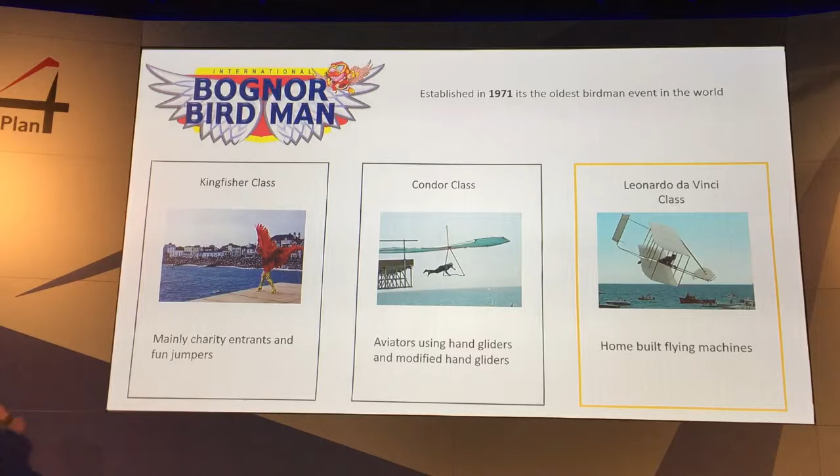So early 2016, I made the plunge and decided to give it a crack - build my own Leonardo da Vinci class aircraft and fly it in the competition. I had to really think about it, and I looked back at what past entrants did, saw what worked, what really didn't. There were a lot of failures, don't get me wrong.

But the considerations I had to make were mainly space - I've only got a single carport garage in which to build it, so I had to really be creative with how I use the space. Money - I'm funding it myself, I had no outside sponsorship, so that was a real restriction, because you couldn't go straight in with carbon spars, bit of an issue. So I had to be quite creative with the materials I used to produce it. And obviously the time factor - I work a full shift, I've got family responsibilities, so I was limited in that respect.

But the first year I entered was the first year they removed the wingspan limit for the Leonardo da Vinci class aircraft. That really opened the door to the possibility of sustained human-powered flight, which, my mind exploded when I heard that. I was all geared up for a limited wingspan, limited potential, but as soon as I heard that, my ears pricked up and I was good to go.

During my initial investigation into the world of human-powered flight, I came across this fantastic website - Chris Roper's website - which basically gives you a blueprint of how to build the perfect human-powered aircraft. It wouldn't have happened without that website. I'll rave about that all the way through the presentation, because it is really fantastic.

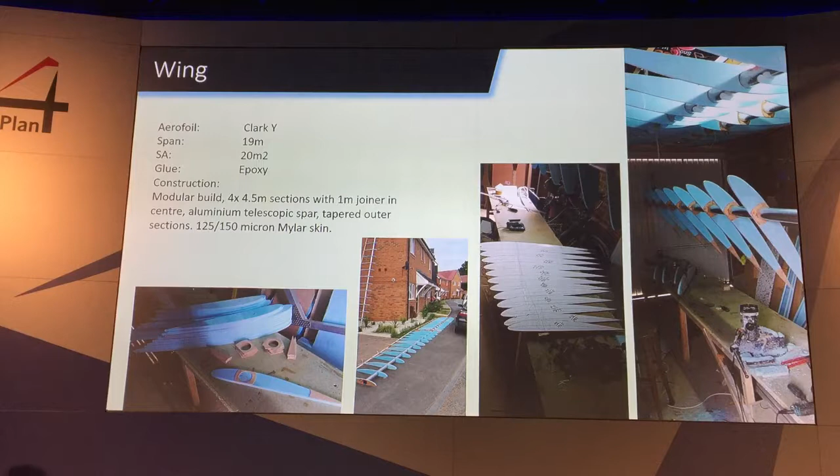And here's just the outer ribs preparing to be cut with the rib strengtheners there. The rib strengtheners and the outer two ribs were made of plywood I bought from Wickes. So 3.5mm plywood, just standard, just cut it on my router. I mean, it wasn't ideal material, but it was cheap, accessible, and it worked absolutely brilliantly.

So moving on to the fuselage. To keep it as simple as possible, as I said, I never built one of these before. I never built anything this large before. So I decided to keep it very, very simple. And the simplest way I could think of doing that is to keep everything box section, because it's easily attached to itself, easily cut, easily machined. So I went with box section, and it turned out pretty well.

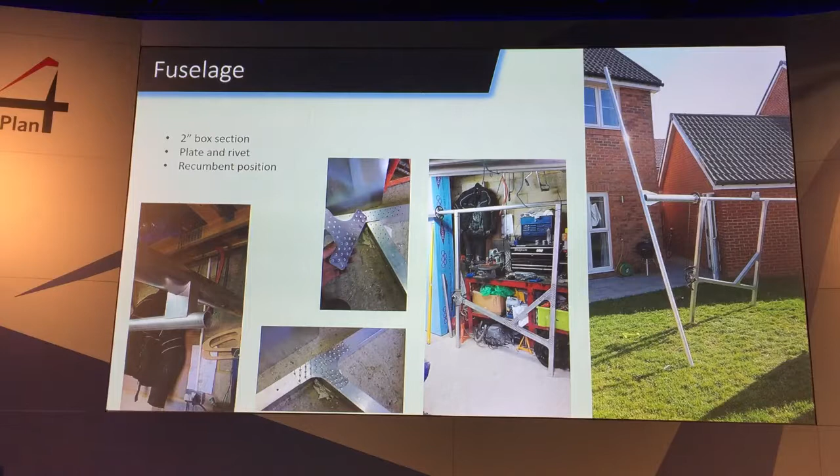Okay, so my control surfaces on Mark I Zephyrus. Probably the weakest section of the whole machine, if I'm totally honest. I used control cables as a method of controlling them. The surface area in relation to the rest of the fuselage, the wing, the centre of gravity, was all a total guess. I had no idea what I was doing. It was more how it looked. So I think in that respect, it was a fairly good guess.

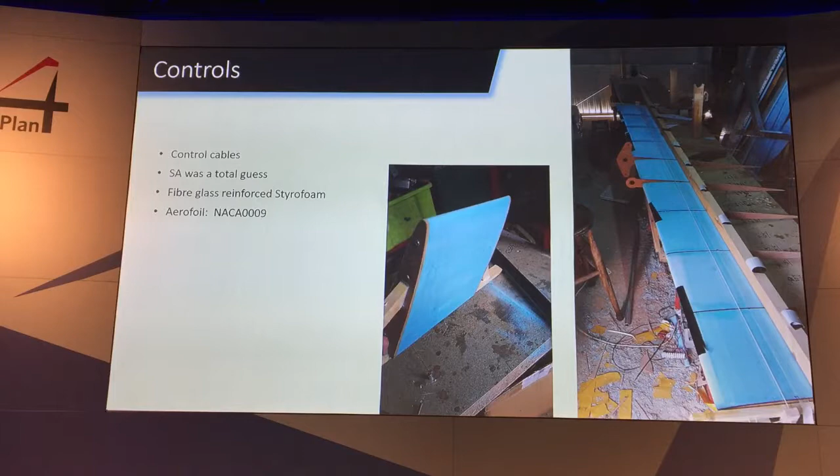And the actual strength of it was made up of the styrofoam, and I had fiberglass tape resin on there. And that was actually fairly secure, so I'm quite happy with how that turned out.

the chord, the size of the prop, the airspeed, the RPM, and it fires out the perfect design for a propeller, and it's ideal. It gives you all the efficiencies lined out, so I could really accurately predict my cadence that I'd have to cycle at, the airspeed that I'd have to achieve. With the other calculators online, the power calculator, I knew the required airspeed, so I could pretty accurately guesstimate that prop was efficient.

And although this aircraft was totally inefficient, given the weight, the materials, my first attempt, I did overestimate the amount of power required. So I put it at about 700 watts to maintain steady flight. To put that into perspective, to cycle at 20 miles an hour on a standard road bike is about 200 watts. So whether I'm even able to hit the 700 watt mark, I'm not sure. So it was a bit of a shot in the dark. Again, it's just for Birdman, I gave it a crack. And it turned out very well.

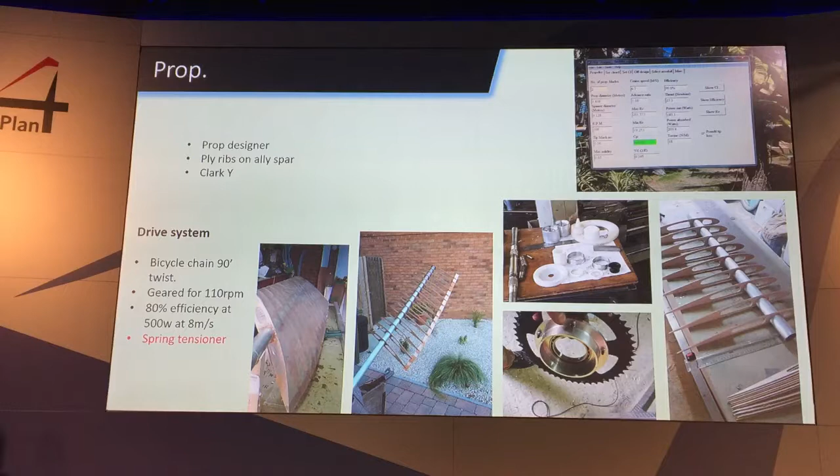So the chain drive system, I had a standard bicycle chain that came up from the main centre drive. It twisted through 90 degrees, and I was really concerned that was going to come off immediately. But it was very secure and held on very well. Geared for 110 RPM. It worked out about 80% efficient at 500 watts. So the 500 watts mark was about my average power output, I guess. And I had a spring tensioner device, so it kept the slack side nice and secure.

So I've got a little video now, just to demonstrate. This is my friend Ed. He helped me out in the last few weeks. So here we go.

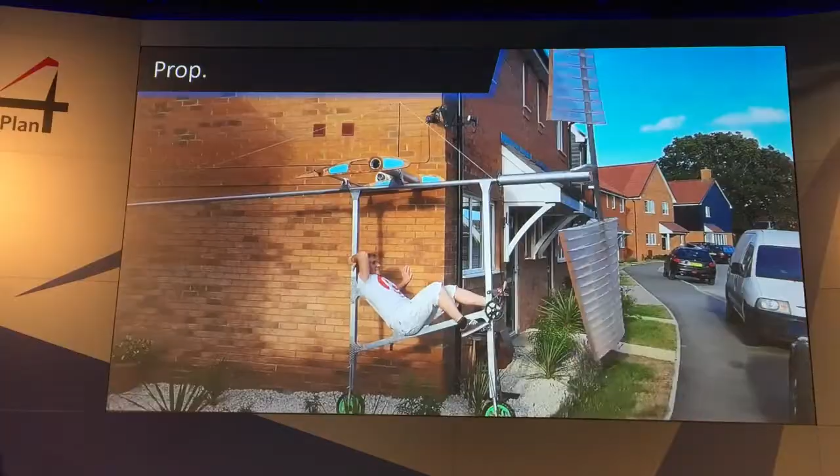You can see we were tight on space, so I had to do it in my front garden. It's very stable there, Ed. You can see the spring tensioner there as well, and we'll come back to that. So there we are. Thank you, Ed.

Had big issues. And a friend of mine, Scott Wallace, and I'll touch on him a bit later on, really helped me out. He cut the top of the rudder off and put it as a tab on the front. That really helped things out. Aerodynamically balanced, it was much better. So again, that was a big error I made. But on the day, it was ready and we were good to go.

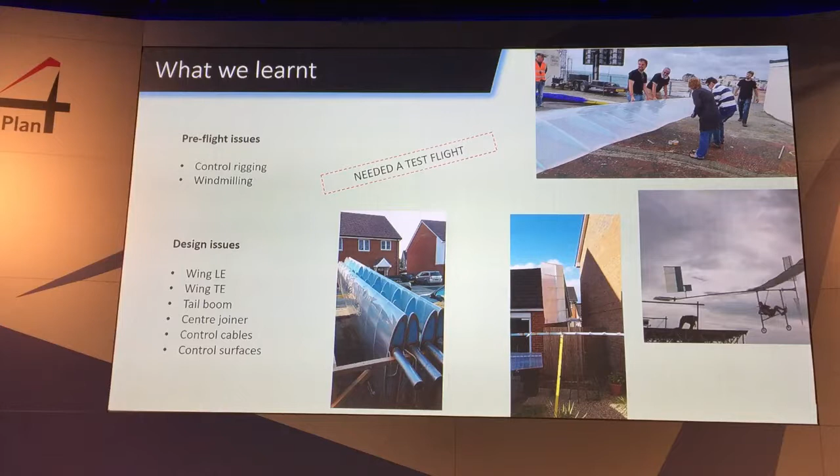So, big one, we needed to have a test flight. That's the main thing that we needed to have. Just to get everything set up, see the weak points, understand what could have gone wrong on the day. I think we could have gone 4 times the distance we did. We achieved 25.2 metres, I think. Sorry, 35 metres. But to be honest with you, I was over the moon that it flew, but I was a bit disappointed that we didn't get a little bit further.

So test flight was the biggest point there. The pre-flight issues we had: if you look at the end picture there, to the right, can you see my control stick hanging down from the centre of the fuselage there? See how far back that is, set to nose up? And it's a nearly neutral control position. So on the day, obviously it was all rigged up last minute.

So had that been rigged up so that control stick was 20 centimetres further forward, I might have had a bit more range to be able to pull out of that dive. But there we go, you live and learn. Also, we had a lot of boom flex, which again doesn't help the control surface and feel. So a lot of that was lost in the boom flex, and also I had the fishing wire as control cable, so there would have been a massive delay on the actual input.

In terms of the design issues, so the built-in problems, we'll cross out the tail boom, I just mentioned that. The wing leading edge, you can see in this image here, this is after it's been shrunk.

We've got terrible creasing, which again wasn't too much of an issue on the day, but it eats into your efficiency big time. As I'm sure you all know, this front 20% of the wing is the critical area for producing lift. So any deformations of the aerofoil in that area will really cut down on your efficiency. And that was really what I was trying to get away from. So that was a big issue.

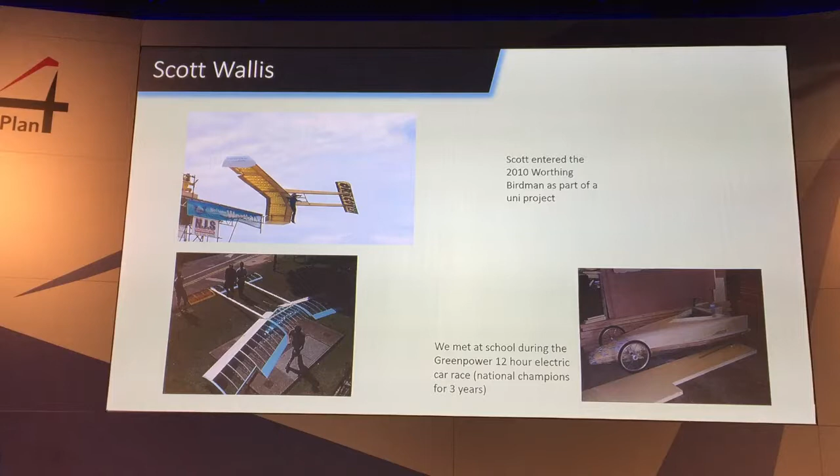But we actually met at secondary school. We were both part of a green power team, which is a competition for electric cars. We raced around Goodwood Racecourse. He was chief engineer while he was there - he's a few years older than me. As soon as he left school, I stepped into his shoes and became chief engineer. So we had a lot in common, we bounced off each other a lot, so I knew we worked well together. He was the perfect guy to bring on board and really drive the project forward.

So, Zephyrus II, the wing, which is substantially different from Zephyrus I. Changed the aerofoil - Daedalus, that aircraft that holds the current distance record, I robbed it off them, in a word. They had several different airfoils, all designed on X-foil - I think X-foil was developed for them. So this was the center of their wing, the thickest chord if you like. I stuck with that, fairly similar. It worked fantastically. 28 metre span, I've gone into that.

So the actual construction material, Gorilla Glue, of all things - you can get it in any hardware store. Fantastic stuff. I had been investing in very expensive epoxy resin, having to mix it perfectly, weigh it, get it perfectly right. This stuff is about 4 times as strong, and all you have to do is spray water on it. Absolutely fantastic, so that really helped the build as well, because with epoxy you have to leave it overnight to cure off, give it a good 6 hours to really harden. With the Gorilla Glue it's about half an hour, and then you're good to crack on and continue with the build. So if you have to jig something, you can jig many more items. I kept with a modular build.

Instead of having the few sections I had in the first one, I've got 7 sections of 4 meters. I reduced the section size. They were 4.5 in the previous build because I was a bit tight on space the first time round, so I thought that extra 50 centimeters would give me more storage area and room to maneuver these things. But I was wrong, it was still a bit of a squeeze.

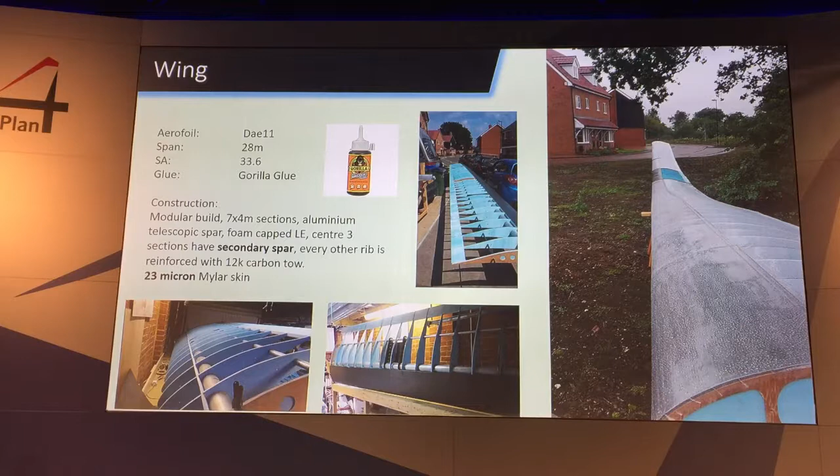Going into that leading edge, I had to make up a former, so I just had a bit of bent aluminium around a wood frame. You tuck the foam in there, heat it with a heat gun underneath, and it forms this lovely leading edge. It was a bit time consuming, because I had to make 28 of them, but yeah, it worked absolutely fantastically.

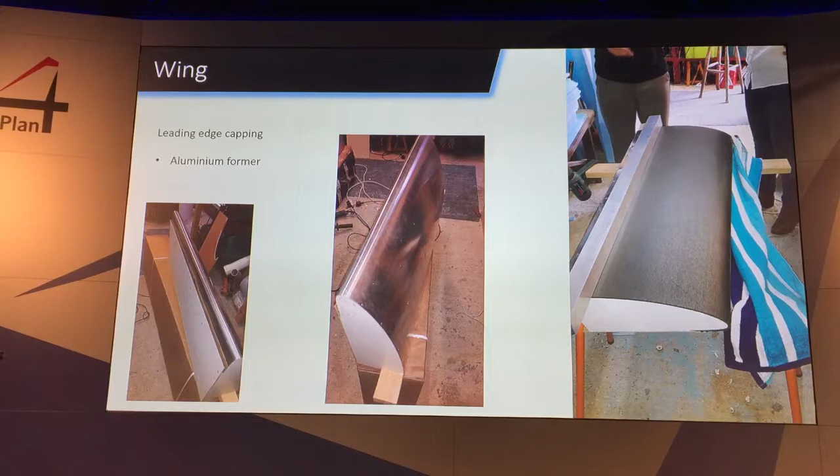Even the top end guys that I've seen in the aircraft, they're not that dissimilar. So in terms of what you can do in a garage with very little tooling and money, I was more than happy.

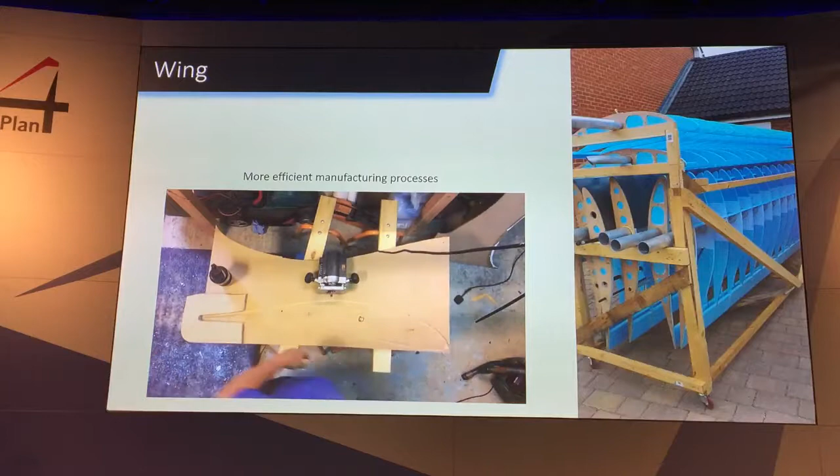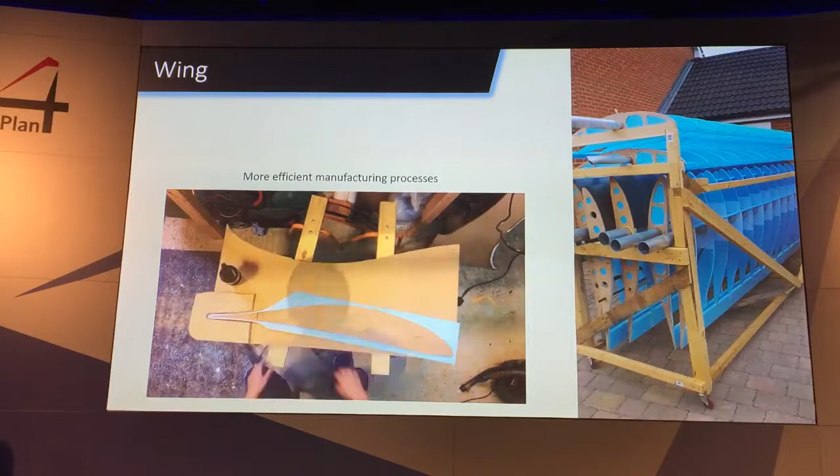So, a couple of videos here of how I made the ribs. The best way of producing them I found was in a jig, as you'd expect. But the router was the best finish by far, it was a quick cut and it did leave a nice clean edge. I tried running a knife around the edge, but it really cut into it and didn't leave a very nice finish.

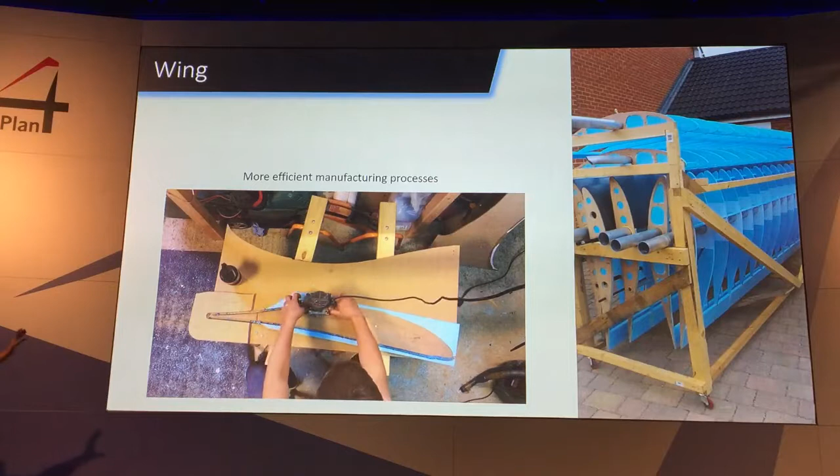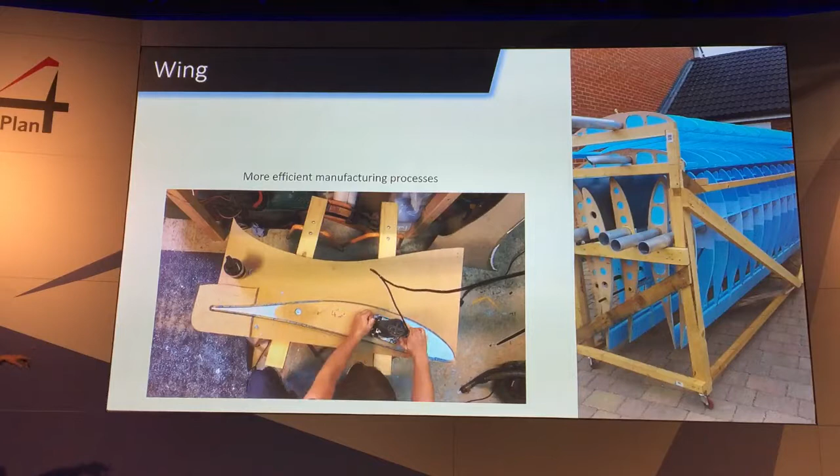The router was the best option, and it also allowed me to keep this standard size. As I said, it's standard chord from root to tip, I kept this standard aerofoil shape, so every rib was cut with that one jig. But I used a different jig with locator pins to cut the tapering spars as they went out, which allowed me to be very flexible, and I could just make a new jig if I needed to change one set of ribs to the other.

I had to reinforce the outer ones, you can see here, with paper and PVA glue reinforcing. That was purely because you didn't have a secondary spar, and any torsional loads had to be translated just through the styrofoam, so I reinforced that.

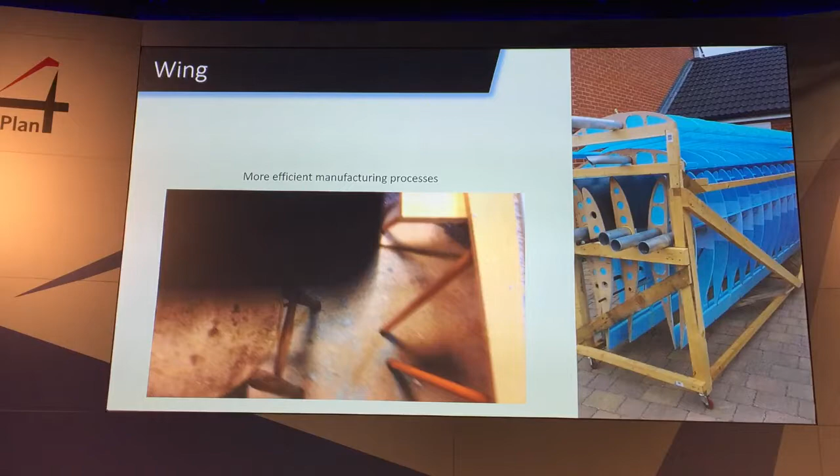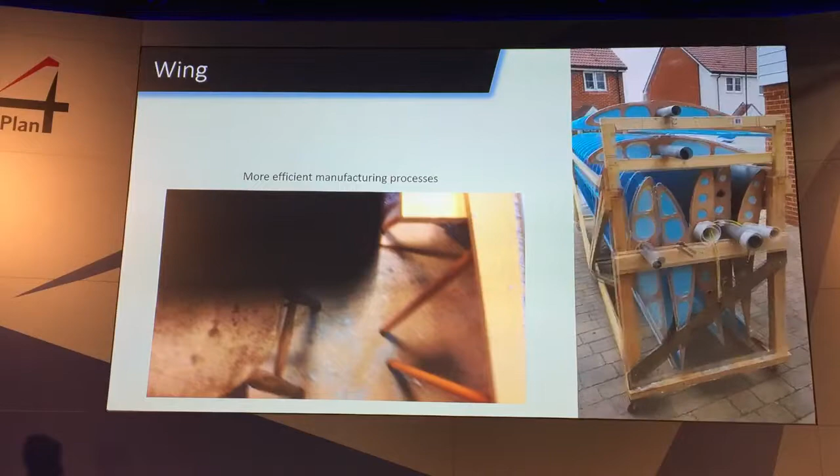This video here on the right is a walk around of the wing trestle. This is how I stored the wing when I wasn't working on it. It went into the garage when I wasn't in there, and it came out when I was trying to work on it, and it actually fits perfectly into my transportation trailer. So it served its purpose very well. As you can see, it's very big.

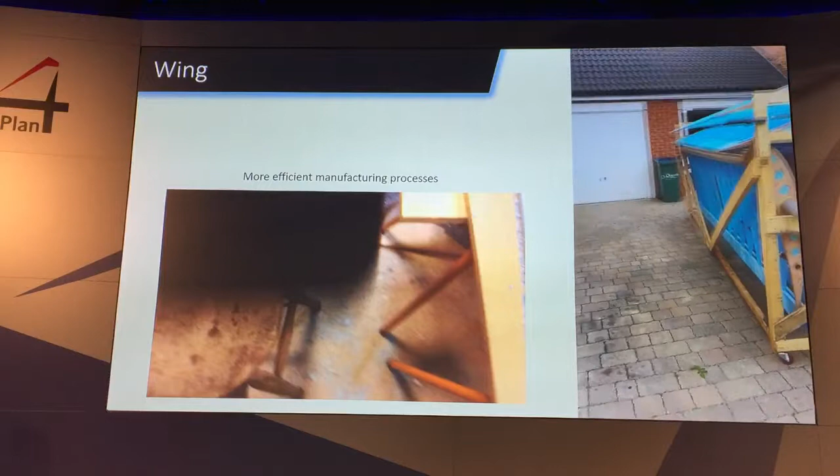So you can see all of the reinforced outer ribs there.

So the fuselage and boom. I mentioned the flex in the Mark 1 boom and the issues we had with that. That was totally addressed with this fantastic addition from Scott: carbon fishing rods. For the price and effort he went through to build that, it's fantastic, and it did work pretty well.

I'll put you, just a comparison here with the new one compared to the Mark 1. Thank you to my beautiful assistant, my dog, there.

You can see in this one here, obviously it's a lot taller. That's to accommodate the additional span. We had to make it taller to keep the angle of the guy lines fairly healthy. If we made it any shorter, that angle would become more and more acute, and the tension would go up and up — at 1.2 G you're talking about 700 kilos per cable, which was getting a bit ridiculous.

We also angled this rear support slightly forward. That's because in the Mark 1 we had a bit of flex in this top bar. So we brought this forward between the main and secondary spar, and that took all of the lift load onto that trailing line. And Scott's having a nice sit down there.

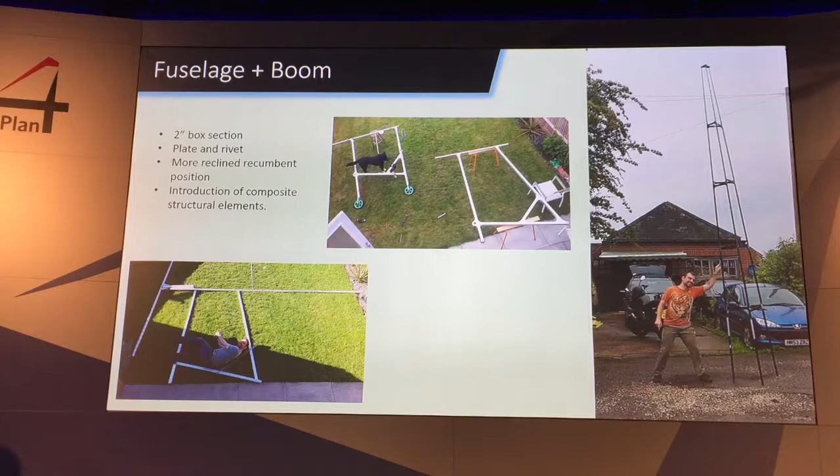So the control surfaces themselves — thank you, Chris, for this one. On his website he's got a nice, simple guide with calculations to get a fairly decent control surface area size. We went with that, and it worked fantastically well, because they came out very nicely.

Just take note for future reference — I'll come back to this — the size of the rudder there. We made it so that the center sections here and here were permanently affixed to the boom. That way you only had to slide on the outer sections of the control surfaces on the day, which made the setup nice and easy. The push-pull rods were already set in, so you didn't have to fiddle around with nuts and bolts — you just had to slide them on. That worked really well, and I'm going to carry that on, I think.

We used push-pull rods instead of control cables — aluminium push-pull rods. They were a little bit heavy, but the authority and sensitivity of the controls was absolutely fantastic. You could move them a fraction of a millimetre with fairly good accuracy, obviously utilising the carbon tubing.

So we kept with the fishing rods on the control surfaces, and they worked very well. They were a lot lighter than the aluminium we had last time.

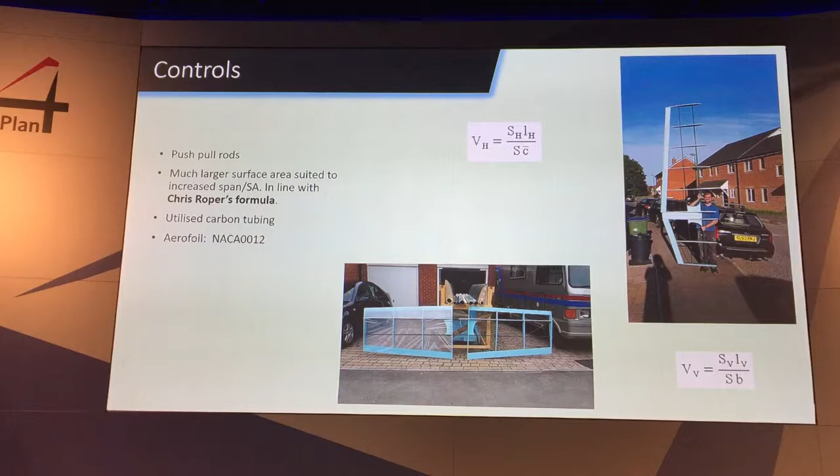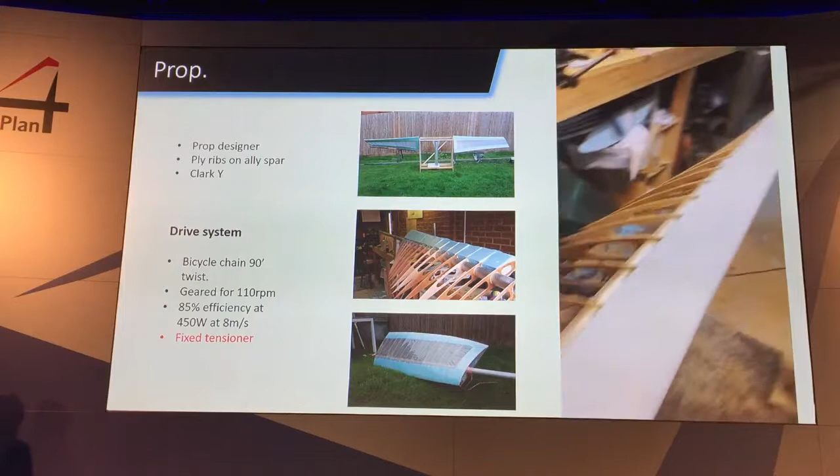So the propeller itself is actually the same frame I used before — the same aluminium tube sections. I made up new ribs. There was very little damage on the first one, mainly because when I hit the water the first time, all of the ribs broke off the tube and it auto-feathered, so there was no load on it and it didn't take too much of a wallop.

I filled the leading edge with styrofoam and sanded it back, as you can see in this video. That came out fantastically. I'm sure it had more efficiency, because the initial one was purely just wrapped in mylar, and it wasn't exactly perfect.

This one, we had to reduce the pitch slightly because of the reduced flying speed of the Zephyrus II. That brought the efficiency up by 5%, but we also marked it down to 450 watts as well. If you push harder, you'll just overspeed slightly and the efficiency is reduced a bit, but you gain additional power. So I was happy to keep 450 watts as a baseline to work off of as the most efficient point.

The fixed tensioner — we had issues on the pier with the Mark I aircraft. We got up there, all the film crew were filming us, all ready to go, all the pressure was there, and it started windmilling horrendously. I took the lock pin out of the prop, it windmilled, put load on the slack side of the chain, stretched the tensioning spring, and it all fell off right on the pier with 8,000 people watching. So it wasn't ideal. I stuck with a fixed tensioner this time.

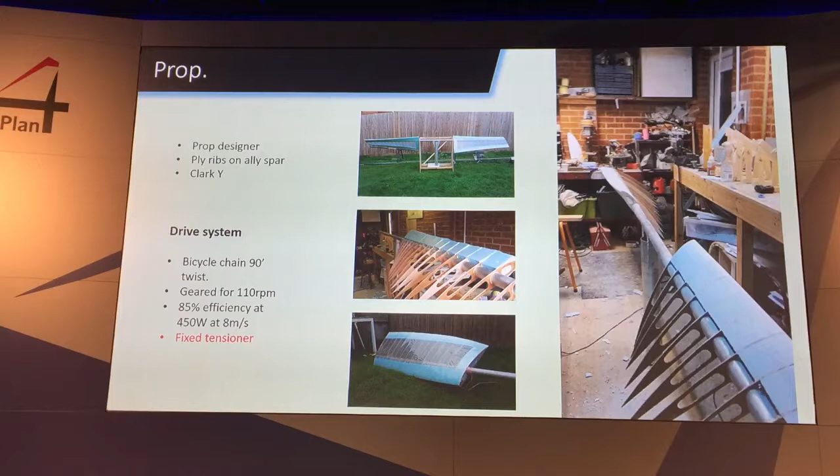I ended up having to run up the pier with a bit of locking wire and just tie that down, and it stayed on the first go. This one I was much happier with — the chain run and the actual prop finish itself was absolutely fantastic. We stayed with the bicycle chain, as that worked very well, so I kept it.

I was limited for space, so I had to accommodate that. We put the wing section together for the first time, and it all went together quite nicely, no mishaps as such.

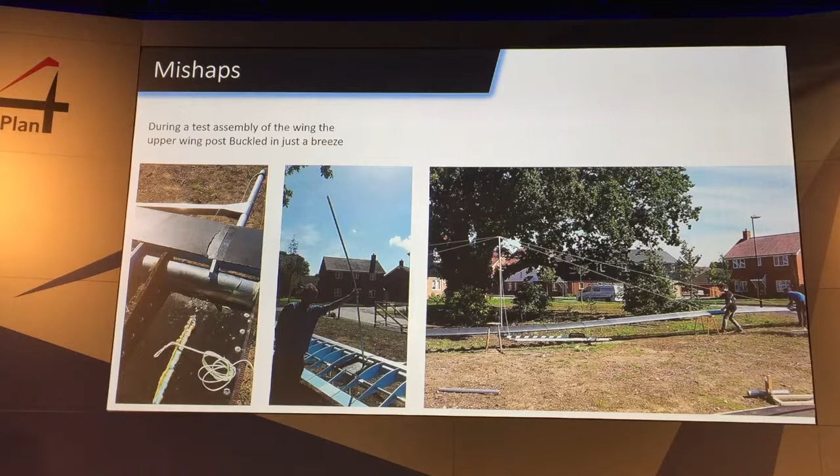So we had to make improvements, and you can see them here. For the wing post, I wasn't going to muck about - this was too close to D-Day. We upped the gauge of the material substantially, and also put a solid tail brace in there, and that didn't break at all. That was fantastic.

So, little video here for you.

As you can see, we're very near completion there. This was only a week or so before the jump, so we were pretty tight against it again with time. What you'll notice is the rudder - we haven't got the upper rudder on, and I wish we had done. I wish that day we had stuck that rudder on and seen what would happen, because I'll go into later, but I was really not very happy with the consequence of that.

But everything else worked very well. We set the guy lines nicely. We had a bit of an issue with the drive clipping there, so that did expose that - it was a good thing we did. But again, it was only a light breeze that day, and we had real issues trying to hold it down. With that 33 square metres and that nice, smooth leading edge, it was really ready to go.

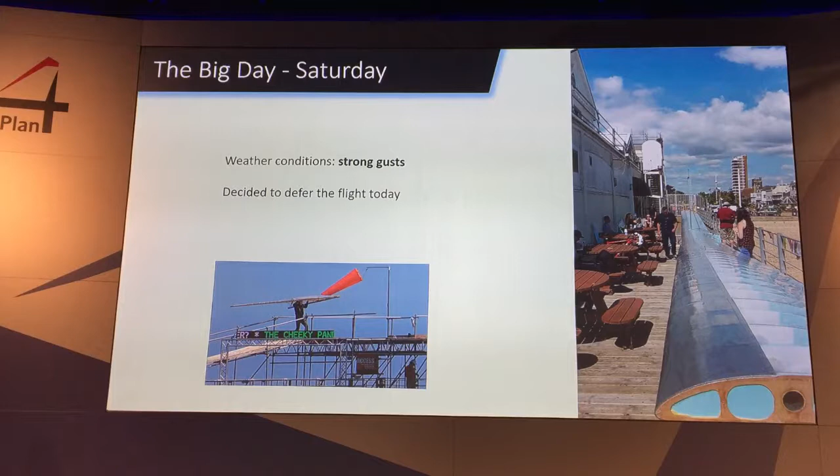And the weather conditions were not ideal. They started off quite nicely. We got there and the wind was blowing about 7 knots, and then the gusts started to kick in, and we soon realised that it wasn't going to happen. It was far too windy to even attempt to move it, let alone try and throw it off the end of a pier. So unfortunately, we did have to pack it all away again and take it home, which I wasn't too happy about.

But on the Sunday, the conditions were far better. It's still a little bit too windy, because there's a hell of a surface area there. And at CL Max, there's a lift potential of 350 kilos, so that's three full-grown men lifted off the floor. So even if there was a handling error, there's quite a risk there to people's well-being, if you like.

So I'll show you the video, you can see how we do. I'd like to get your feedback afterwards and see what you think went wrong. This is the best video I could find of the event, it's not the official video. It's some person from the beach, but it's a very good angle. You might hear some people on the beach, but it's a very good video. Gives you some idea of the size.

I counted up afterwards and we had 11 people on the pier with us trying to help move it. Zephyrus II, human-powered machine. Absolutely wonderful. Making its way, just about to start. So up the land, leading on to the launch platform. Scott Wallace is the pilot. He's a professional cyclist. This was designed and built by Sam Kenny, Aeronautical Engineering Captain.

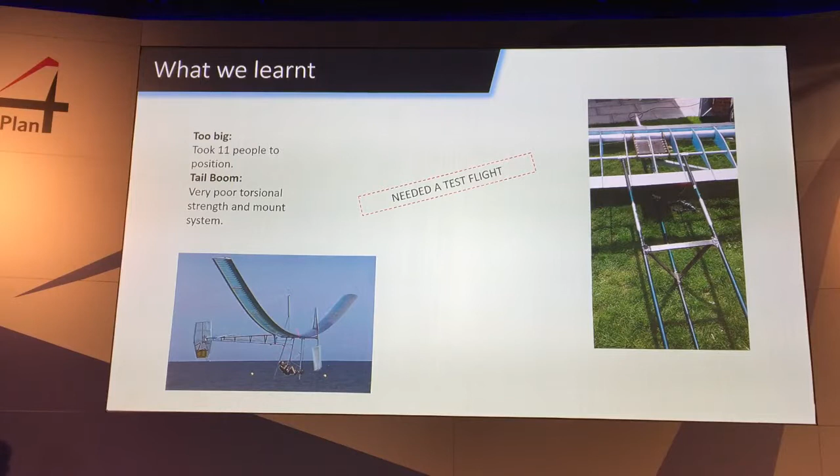It held together, and it flew for as long as it flew. I've got to walk away happy, but not necessarily fulfilled, as I hoped I would be. So what is next for me in this bizarre venture that I'm doing, bizarre hobby I have? There's definitely going to be a Zephyrus III.

Having come so close to doing a real decent distance. I mean, some would argue that 38 metres is a decent distance, but I really want to impress people and set some insane 2-kilometre distance. So I think Zephyrus III, although I've started dabbling in the construction, I've got some other projects on the go at the moment, so it's taking a bit of a backseat, but it will be ready for next year.

It's going to be somewhere in between Zephyrus I and Zephyrus II. It's definitely going to be smaller than Zephyrus II. It's far too much surface area for an event like this, where you can't have predictable airspeeds, and you're flying in the middle of the day, which is also one of the windiest times of the day. So I'll definitely bring the surface area down. I'll keep a similar span, I think. But they're all things to look forward to and try and plan for. A bit more planning, I think, is required.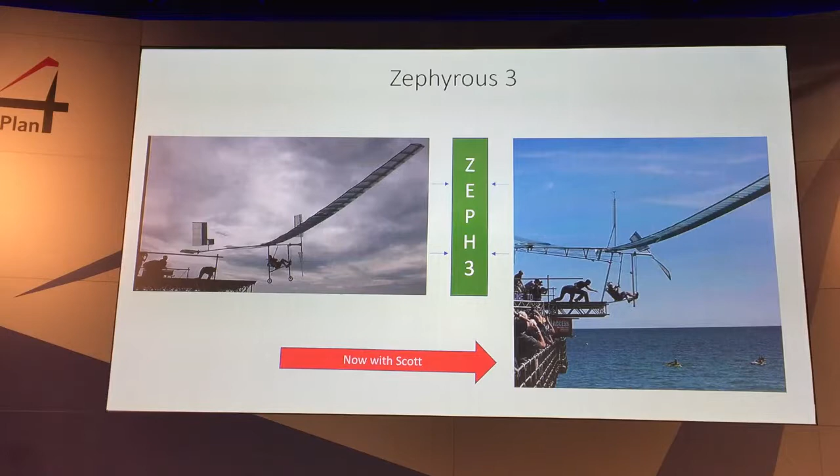But beyond Bognor Birdman and Zephyrous itself, the Kremer prizes, there are still 3 up for grabs, 2 of which are potentials. The marathon, you've got to achieve 26.2 miles in under an hour over a figure of 8 course. I think in the write-up there's also a hurdle in the middle, a 10-metre hurdle you've got to clear every time. But that is incredibly hard to achieve, the marathon. That's why no one's done it before.

Currently, the airspeed record for a human-powered aircraft is 27 miles an hour. So that's an incredibly fine line. You'd have to be almost breaking the world speed record for an hour to achieve that prize. So I think a lot has got to happen before I'm there, but it was definitely something to look forward to and a goal to focus upon.

There's also the sporting aircraft challenge, which I don't think I'd be too interested in, even though it's double the money. It's a lot harder to achieve. You've got to create a machine that can be used in sporting events. People could fly against each other, and there's not much glory in that. I'll be much happier with the marathon.

Project Aeolus. This is a project that me and Scott have sort of fathomed up. On the British Human Powered Flying Club website, they have a record board of all of the world records and British records achieved in human powered flight. And although aircraft have done more than the 1 kilometre it states, I don't believe they've been recorded to have done that. So it would be nice for a British aircraft to achieve some insane distance, like 20 kilometres, for example, which is very achievable with human-powered.